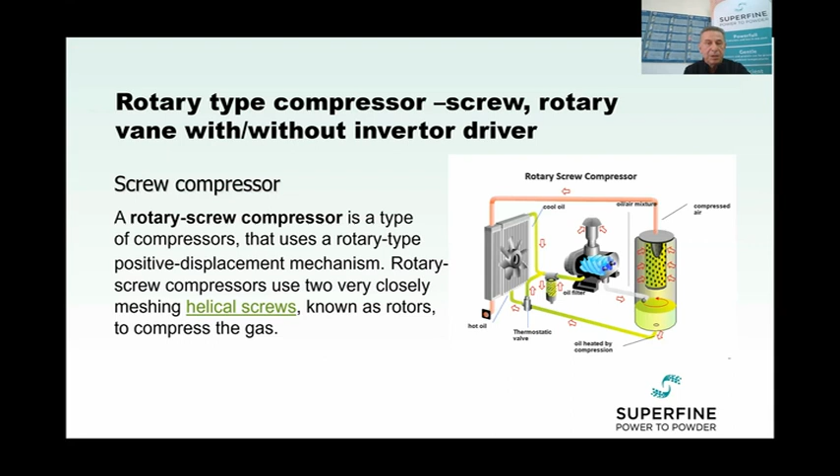The meshing rotors force the gas through the compressor and the gas exits at the end of the screws. The working area is the interlobe volume between the male and female rotors. It is large at the intake end and decreases along the length of the rotors until the exhaust port. This change in volume is the compression.

Rotary screw compressor advantages: they have 25 to 30% higher energy efficiency than piston ones, have a lot less noise and vibration than piston compressors, and occupy less space than other types of compressors. A lower capacity pressure vessel can be used. Screw compressors in excess of 2000 liters per minute have a lower maintenance load than piston compressors.

Several sets of screw compressors can be connected through the grid, and an energy optimization policy is applied. The control of the air conditioning process, the installation of the inverter, as well as the state of the device is very simple. Due to fan and radiator cooling of oil and air, the compressor can continue without stopping and without air loss.

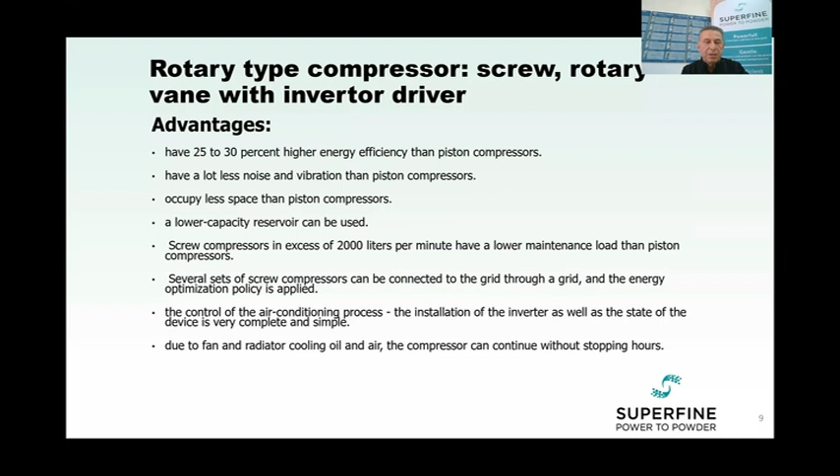Due to the independent cooling fan and the cooling system, the outlet air is far cooler than in piston compressors. The quality of air is far higher than in piston compressors. This is most evident in the temperature of the outlet air and the amount of oil in the outlet air. Slide 10. Rotary compressor disadvantages.

Screw compressors are more expensive than piston and rotary vane compressors. Screw compressors with a capacity of less than 2000 liters per minute have more maintenance than piston ones. At capacities below 500 liters per minute, piston compressors also have high competitive advantages, which can be referred to as the initial cost, low maintenance cost, and the simplicity of the system.

With failure to observe maintenance, use of inappropriate oil and non-standard parts, the device will be vulnerable. It will require a more experienced operator to maintain the machine.

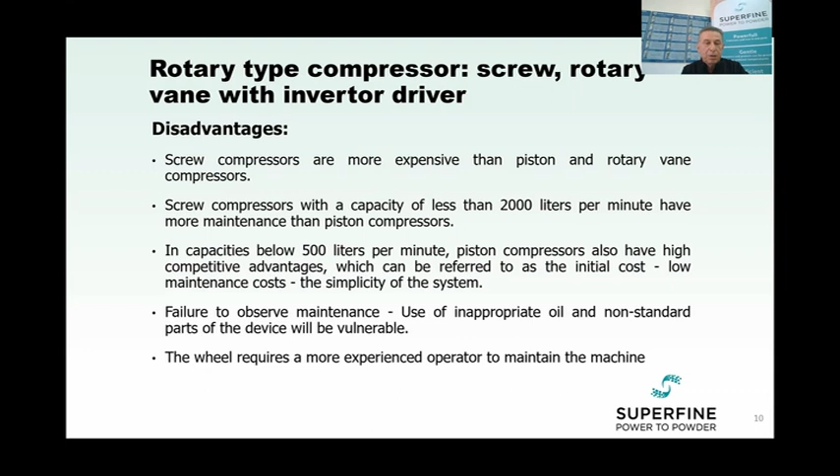Rotary vane compressor consists of a cylindrical casing, two openings, one suction and one discharge, and the rotor positioned eccentrically with respect to the casing. Compression occurs by air flowing into the chamber, where due to eccentric rotation, there is a reduction in the volume.

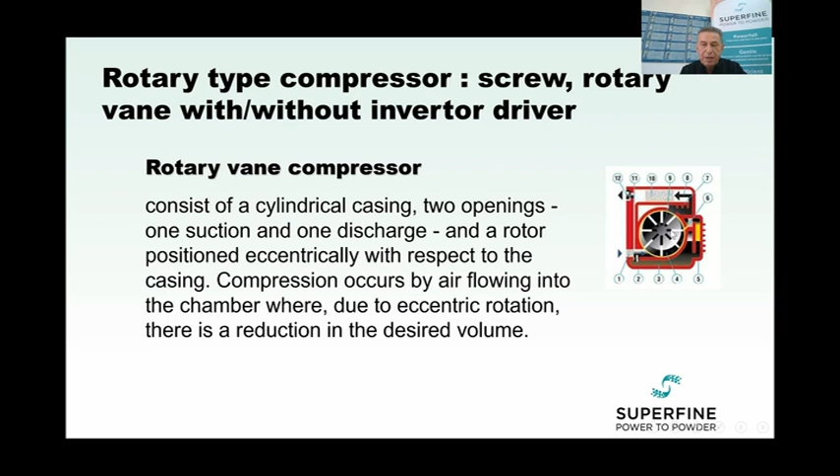Direct coupling: the compressors are silent and are equipped with an elastic coupling between motor and compressor, without gears or belts to be changed and no ball bearings to be maintained. Each unit holds very little lubricant, typically less than half that of a rotary screw air compressor, which saves you on oil change and disposal cost. And lower maintenance cost is also important. Maintenance operation only includes changing the oil at predetermined intervals, cleaning or replacing the air filter, and cleaning the radiator.

But rotary vane compressors have some disadvantages. First of all, a higher price, due to the fact that they are more complicated in manufacturing and mainly require balancing. Limited air supply ability for one unit, not more than 60-70 horsepower. Higher noise level, and they require more space due to the axial connection between motor and compressor.

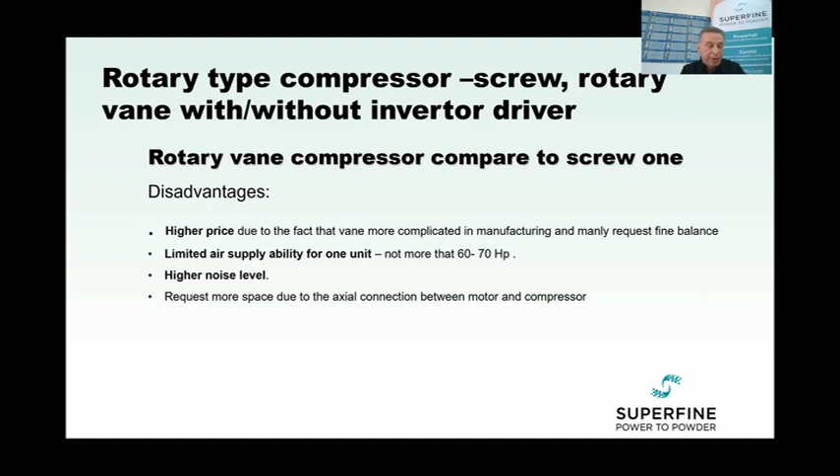Slide 14. Oil and oil-free rotary type compressors. In many processes, compressed air comes into contact with components, its production, sensitive products, or the human body. In these cases, air purity is a critical parameter. Therefore, oil-free is the preferred solution. Oil particles in the air could contaminate components in production and damage products.

No oil means that there is no oil for sealing the rotors and for cooling the compressed air, elements and rotors. Because there is no oil for sealing, the rotors need to be very precise and have very small tolerances. Oil-free compressors, as their name suggests, do not require lubricating oil. Instead, the rotors are pre-lubricated with a Teflon PTFE coating.

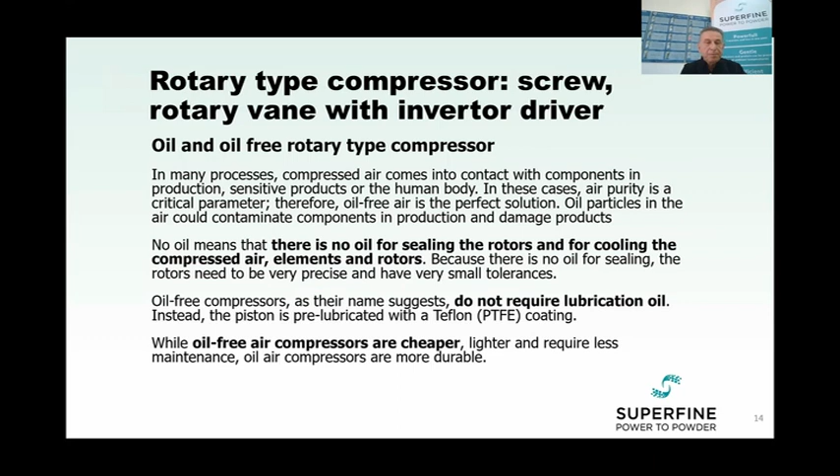While oil-free compressors are cheaper in several cases, but not all, lighter and require less maintenance, oil-lubricated compressors are more durable and have a significantly longer lifetime.